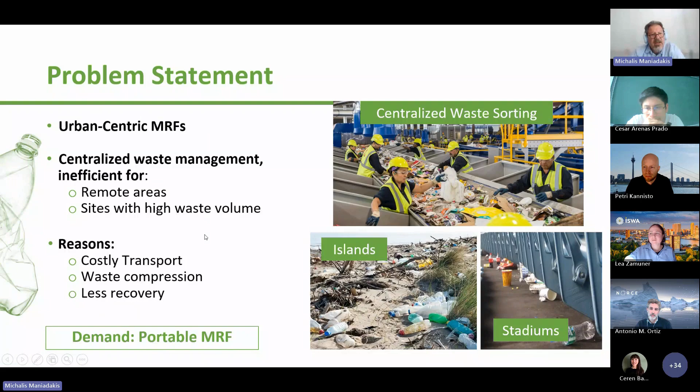So there is a need for a portable material recovery facility, and this is exactly what we are doing in Reclaim. We are developing a low-cost, portable, robotic material recovery facility that is able to sort waste at a local scale but with an industrial level of efficiency. This is more cost-effective, mainly because we save a lot on transportation to the central MRFs.

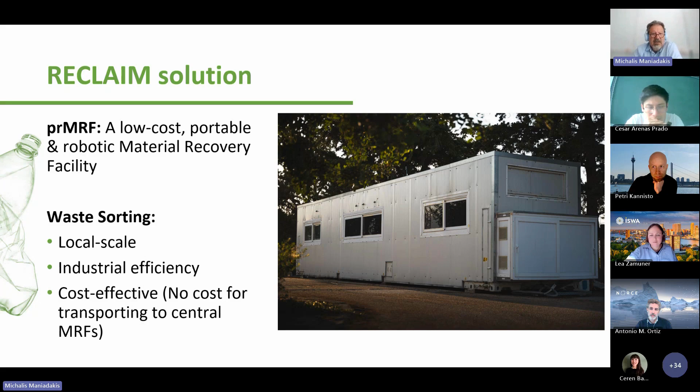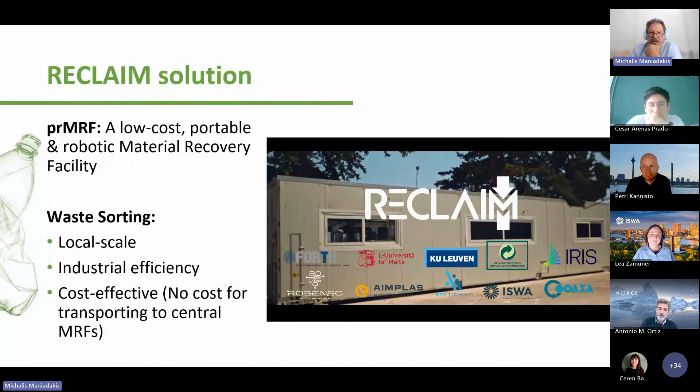This video shows what happens inside this MRF, the container that is full of technology, robots, cameras, and AI. You see there are 5 different robots installed inside the PRMRF that can pick and sort waste into different bins depending on their material type.

To make this real and more efficient, we have developed our own low-cost robots that do the picking and sorting of the waste. These are linear robots with either 1.5 degrees of freedom or 2.5 degrees of freedom. The 0.5 degree of freedom refers to a piston that moves up and down in a binary mode, and you see that things can run quite efficiently.

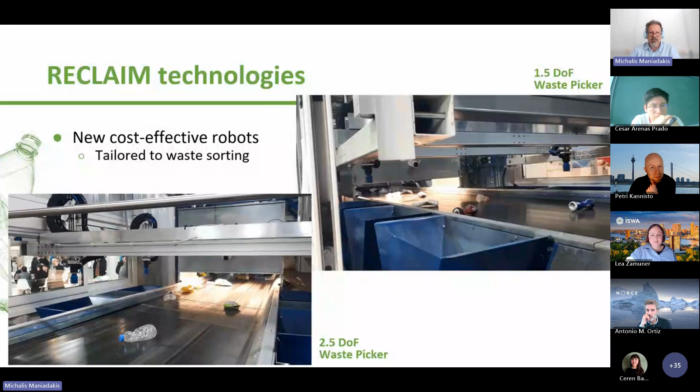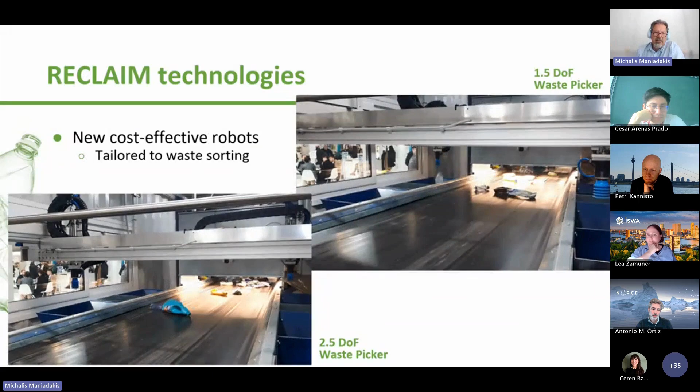Regarding the decision making, we collect a lot of waste images that are processed and used to train our models in order to categorize and identify the waste objects. An example is shown in this figure. We want to categorize objects as PETs, aluminum cans, or HDPE bottles.

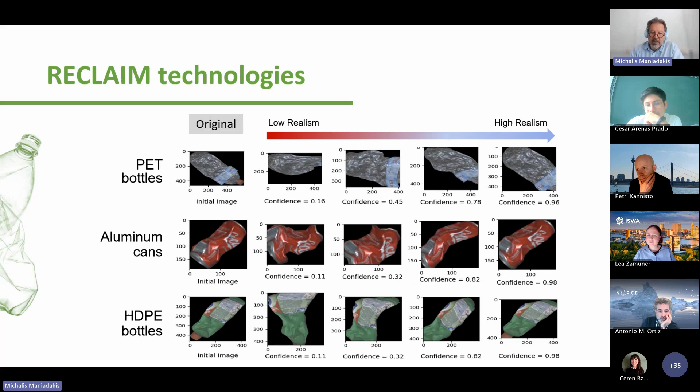You understand that waste images and the deformations they may have are endless. So instead of recording millions of images, we try to produce our own synthetic data, as shown here. We start from an original image on the left and do random transformations to produce new appearances of that object. We have trained a model that can assess the realism of the produced images, and on the right you see quite realistic synthetic images that are used to train our models.

On top of that, there is also the option of dual spectrum categorization, meaning we can categorize the waste in both the visible domain and the infrared domain. This greatly increases the accuracy of our decisions.

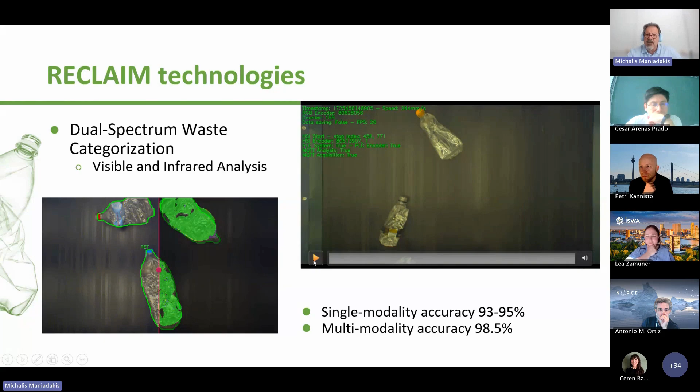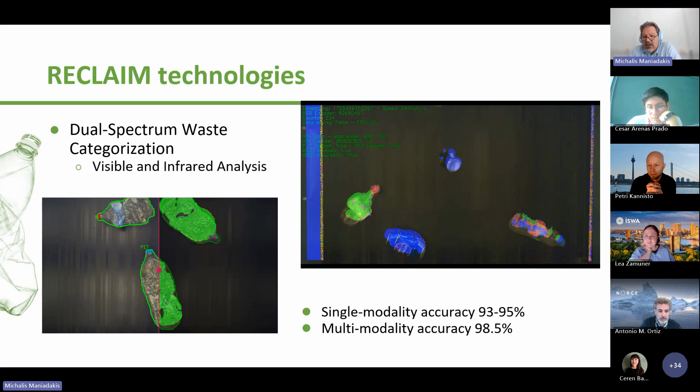In fact, what happens is shown in this video: you see that both categorization approaches have their pros and cons. By combining the two, we can achieve a very highly accurate decision-making procedure that goes up to 98.5% accuracy.

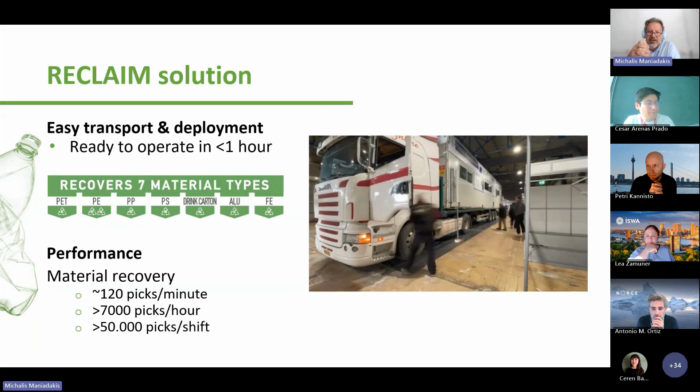Overall, the container we have developed is a full system that can be easily transported and deployed in less than an hour. This video shows our participation in an exhibition where the whole container was transported and ready to operate in less than an hour.

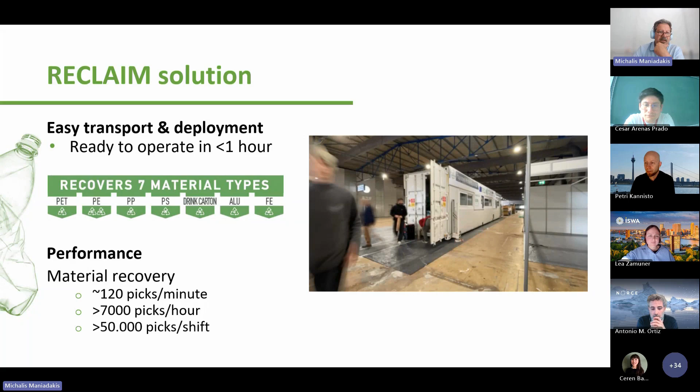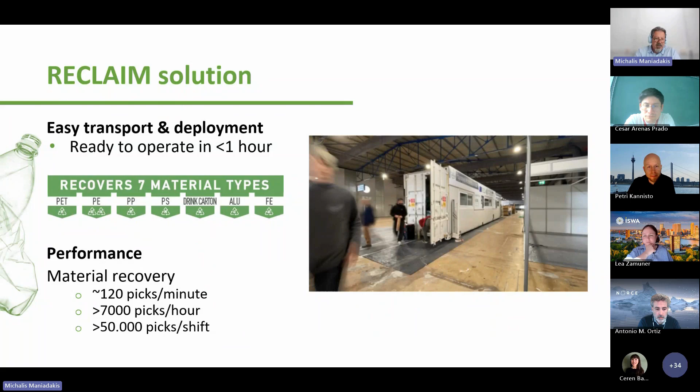The prMRF we're developing can recover up to 7 different material types: PET, PE, PP, polystyrene, cartons, aluminum, and ferrous metals. Regarding performance, it can pick on average 120 items per minute, which overall amounts to more than 50,000 items recovered per shift.

And this is the system that next week we will start using to process waste in Kefalonia Island. These are real waste produced by the citizens and visitors of the island, so we will be in contact with the real demands of waste sorting.

So this clearly shows the need for a small-scale waste processing unit. That is the one that we are implementing in Reclaim. And with that, we believe that we propose a new model of the circular economy that is based on decentralized waste processing, small and local scale.

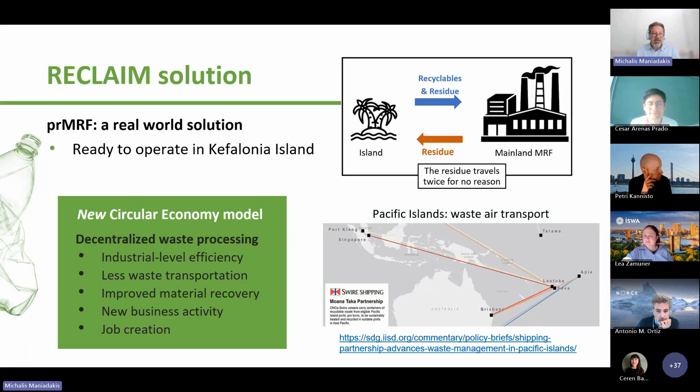And what we achieve is industrial level efficiency for sorting waste, much less transportation of waste. We believe it improves the material recovery because the waste does not need to be compressed, and clearly this creates opportunity for new businesses and new jobs.

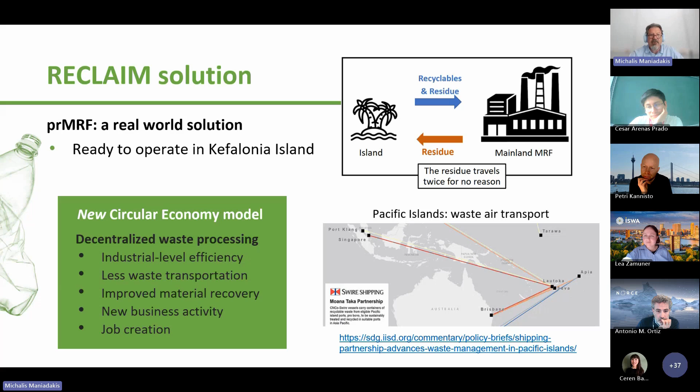So now we can jump over to the other presentation of this morning, moving from municipal solid waste to the metallurgy industry. Petri Kannisto is a researcher of industrial software systems, and he currently works on data-driven software architecture for controlling steelmaking. He's a researcher at the BFI and within the ALCHIMIA project. So if you want to take the floor.

Okay, thank you very much. Can you hear me? Yes. Great. So thank you for the introduction. So it's only 7 minutes, so I cannot cover in depth, but just to briefly give you some motivation and the background of the project. Now it seems that it went black for me now that I use the full screen. So, but maybe just a second. Is it better now? Now it's okay.

Yeah, okay great. So the project goals and problems that are behind, where the motivation comes from: the variety of optimization models we need in this project, and then how to optimize scrap reuse, because in the end this webinar is about waste and reusing waste in a new way.

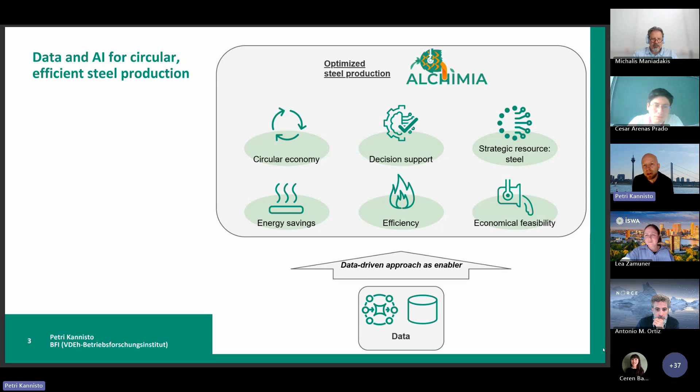Steel is a strategic resource, so we want to make steel in Europe also in the future. Steel is more or less everywhere, you could say. That's why we want it to be economically feasible so that these steel plants can truly remain in Europe. On the other hand, we want to save energy and we want the processes to be efficient. All of these goals can be reached better with data-driven approaches, as you can see at the bottom. So data enables reaching these goals.

So first about the CELSA use case, which is the main use case regarding this presentation. The aim is to make new steel products from scrap. And you could intuitively think we just melt the scrap and then we have steel, but this is not the truth because the scrap comes in many sorts, in many qualities.

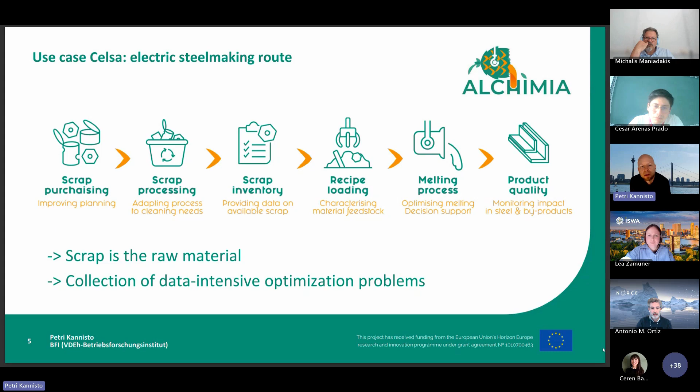Some of the scrap types are purer than others. Then on the other hand, the steel products also vary, so they have various requirements regarding chemical composition, for instance. So there's plenty of steps, and we don't focus on all of these in this project and in this presentation either. But just to give you an overview, there's multiple problems, and all of this can be facilitated with data, transforming scrap into new products.

The other use case, which receives less focus in this presentation, is FDT, Fonderia di Torbole, producing automotive parts from steel. It has still environmental impact reduction as a goal, and also cost reduction, of course, quality standards, and then keeping these processes efficient and not causing too much waste.

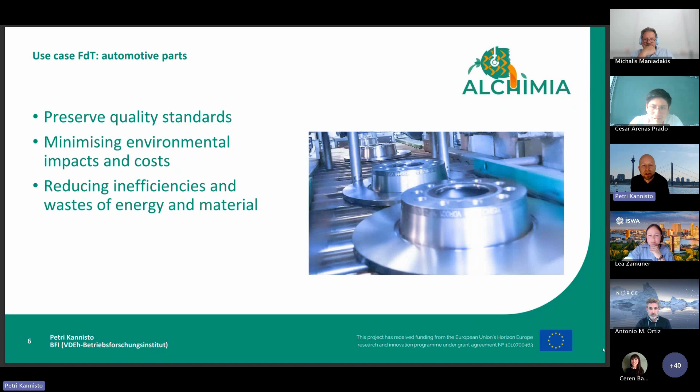As a novelty from this project is federated learning. As a method, this is something that has been applied for some time already, but not so much in steelmaking. So what's behind here, as we have these optimization models, these are operated in plants, in steel plants.

There can be exceptional situations that have not been faced in some of the plants. When the plant faces the situation for the first time, it is beneficial if it has already received some knowledge about this from the other plants.

The other related item to talk about is continual learning. The idea is to monitor the performance of the models and then retrain, regenerate, or reparameterize the model if it seems the performance has degraded. This is something that's going to happen if you use scrap, since scrap as input material is fluctuating and its quality rarely stays very stable.

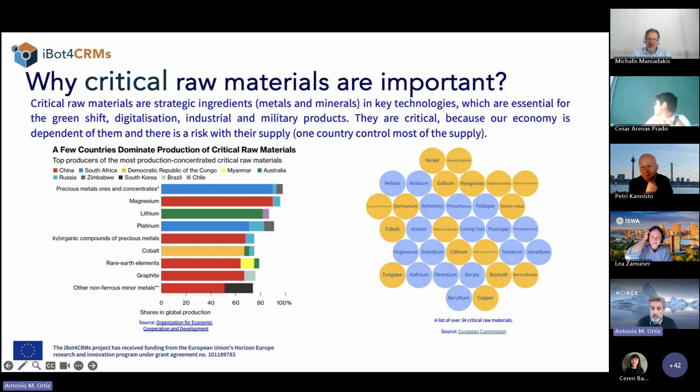So it's key for Europe to recover as much of these critical raw materials as possible from waste, in order to be reused in further manufacturing processes. In fact, the European Commission has set a high priority for this in order to keep sovereignty and resilience in the world industry. So they have published the Critical Raw Materials Act that details all these needs about keeping the raw materials we have and recovering them from urban waste mainly, so we can become more and more independent from the producers of these critical raw materials.

So currently, the situation for urban mining, recovering materials from urban waste, is mostly manual. There is manual sorting from residual waste, manual sorting from shredded products, manual disassembly of products in order to recover these materials. Here, for example, it's shown the recovery of magnets from hard disk drives. There is also manual dismantling of different components, different electronics or other appliances, and the recovery of materials from landfill is not fully explored.

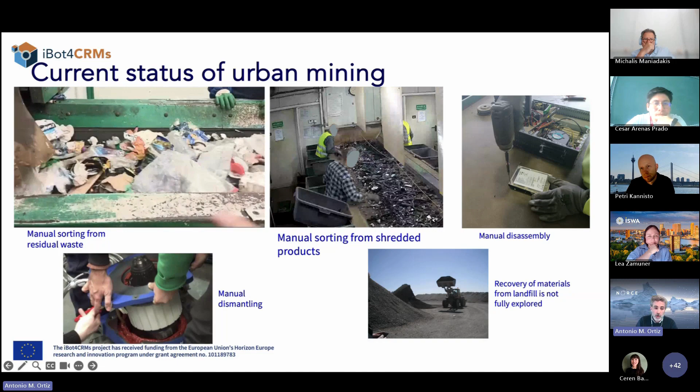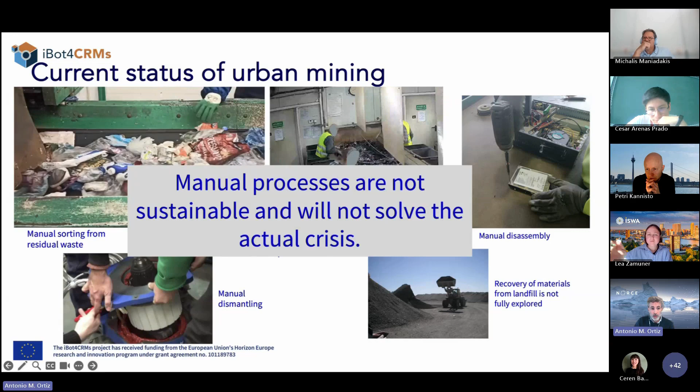The thing is that currently, with the volumes of waste we are generating nowadays, the manual processes are not sustainable anymore, and there's no possibility to solve the current crisis. So in order to solve this, what iBot4CRMs is working on is to enable AI-powered self-learning robots to first valorize or estimate the value of the waste, and then perform this recovery of critical raw materials. The project started by the end of last year, so we are still in the early stages of development.

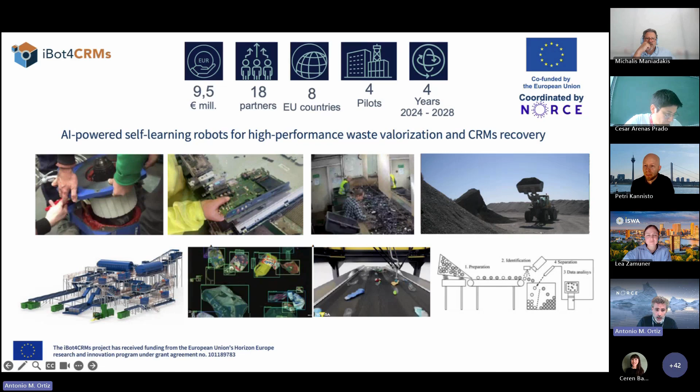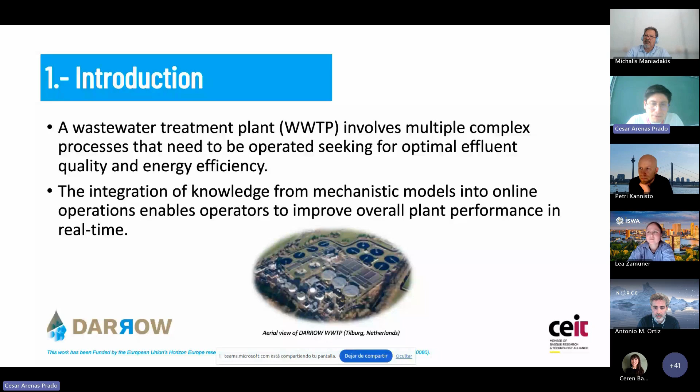Now I present the DARROW project, a European project that wants to increase the technology in wastewater treatment plants, going from waste to resource. Why do they want it? Because they want to reduce energy consumption, since plants consume a lot of energy in the aeration process. We reduce greenhouse gases, since plants produce them, for example nitrous oxide. We reduce waste in the process and chemical consumption, and increase water quality. That's the motivation behind DARROW and how it's going.

We are working together on this. The water comes in through this part - this is the physical process, the settler process - and in that area is the biological process where all the magic happens. We have the aeration process and the biological process, and after that you go to some secondary settlers and it goes out to the river. But here you have some extra facilities.

This is for the sludge. This water, when it comes with the sludge - and this sludge is very rich in organic components - those components are suitable, for example, for agriculture.

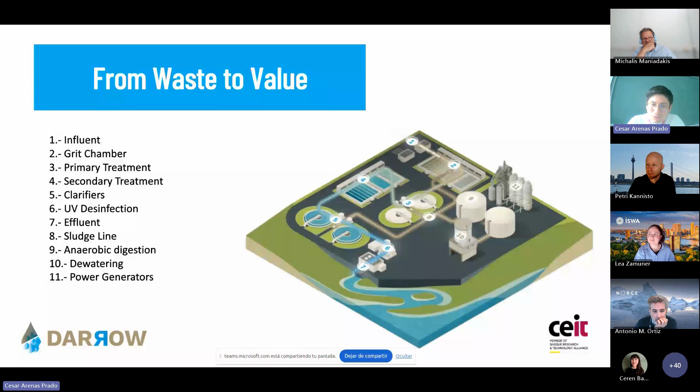Our technical approach or strategy is to use the mechanistic models that come from the past and create a lot of simulations, like 1,000 years of simulations. That's a lot of data.

And we use machine learning models to catch the patterns, to catch the trends, to catch all this internal information that is hidden. And for what? And why? Because we want to create a decision tool. This decision tool is going to be like a support for the workers, for the collaborators inside the plant.

Because as I told you at the beginning, you need a lot of knowledge of physics, chemistry, or biology. But with a machine learning model, we can predict the behavior of the plant, and we can give, after an optimization process, a suitable recommendation. So the adaptation for the workers or the person involved is going to be faster.

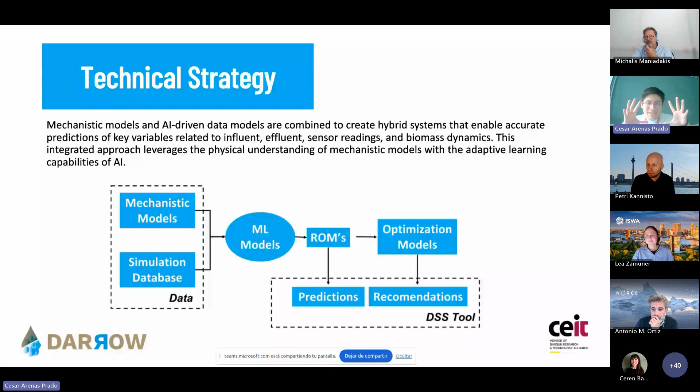So this is the gap that we are trying to fill. This is a space that is between the technical knowledge and the practical knowledge. This is the sketch that we use.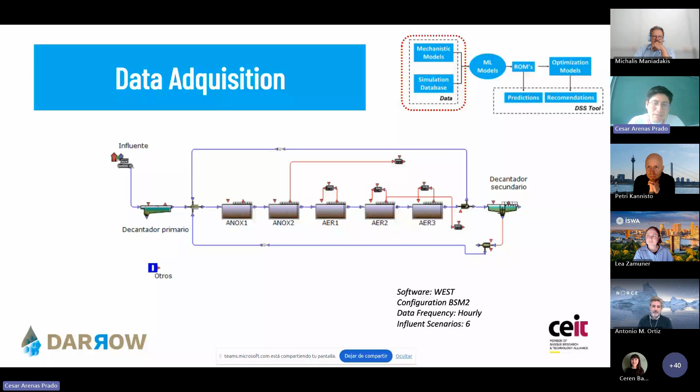So we generate like 1,000 years of data, and we establish our database. So we have information in the past, in the present, and the future.

The influent comes with a lot of pollutants, okay? Nitrogen, ammonium, phosphorus, many things. But you have operational data, like the controls in the aeration system.

Combining it with the biomasses, you will dissolve the pollutants, and you will see it on the effluent. And also consuming energy.

So if we have the data in the past, in the present, we could be able to predict in the future. That's why we use these ML models. For this information, we chose LSTM because they gave us good results, because it's like a temporal series.

Maybe we can go deeper on the technical process if somebody wants to ask me about that, but I'm going to go faster this way. After we have a suitable model that can predict, also I didn't say, but we are able to predict between 12 and 24 hours with good accuracy.

So after that, we realized that if we change the set points and we predict, we're going to get the results. And if these results comply with the European restrictions for the effluents, for example, it's going to be a good solution, but not necessarily optimal.

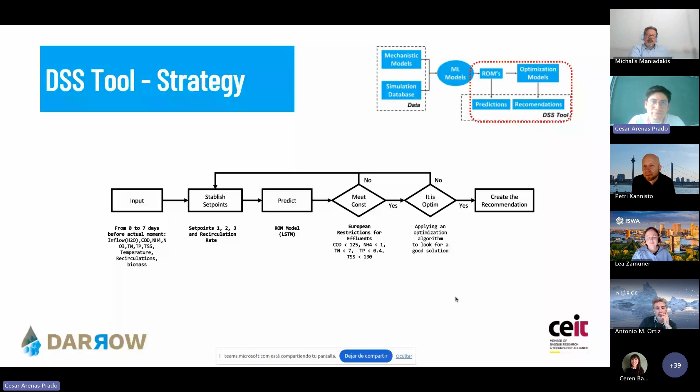For that, we use something. Our tests are being done with genetic algorithms, just to generate multiple solutions. This is the strategy. At the end, it's a multiple objective minimization problem. That's how we do the optimization process.

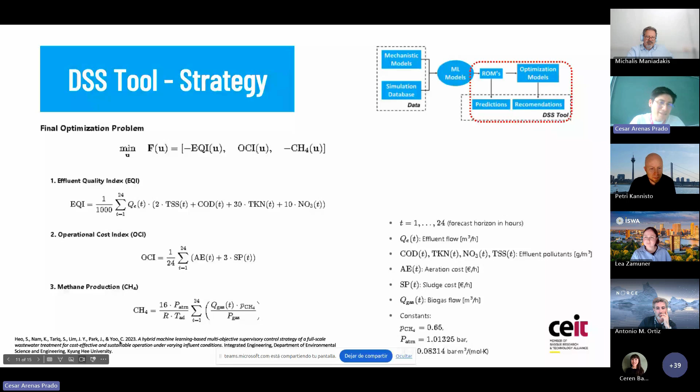I took this as a reference from another investigation from Korea. I just took it from them and tried to adapt it to this investigation. That's something we are going to see at the end of the process.

Now we have the effluent, we have the influent, we have our set points, and for the next, for example, next 8 hours, we are going to establish our set points at these values for being efficient, and that's going to determine our cost and our effluent quality.

So that's what we are trying to do, what we are working on now, just to make the job of the people easier. That's how AI can help people take informed decisions by the end of the day.

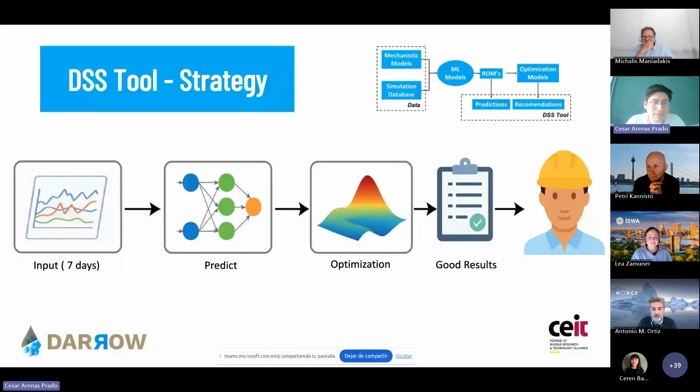Okay, well, I think that's all on my part. If you have any doubt, please just let me know.

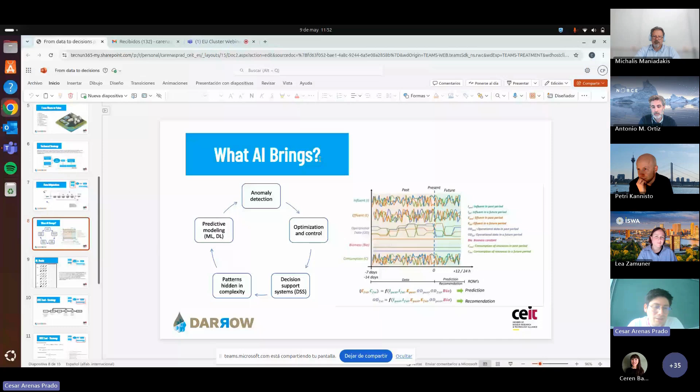This is a very important point and the strength of this method, because we combine theoretical experience and practical experience, and then we can make decisions based on the optimization process. Going to the second part of the question, the optimization process is an iterable process that changes the set points, the operational points in the plant, and predicts with these set points. With the influent set points and predictions, we will be able to see if the prediction can meet the constraints and if it is optimal.

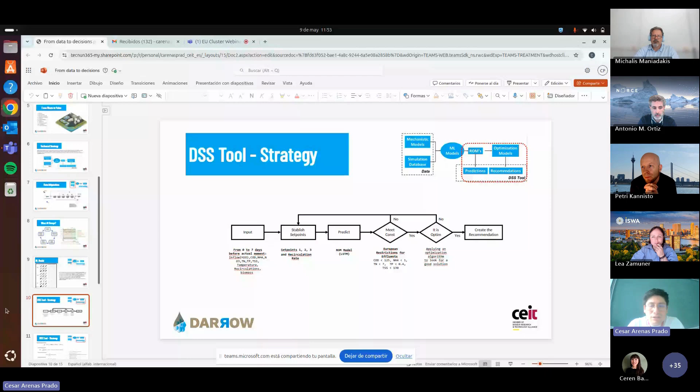So what are the rules for the optimization? We have the effluent quality index, which is a combination of the main pollutants that we have to avoid in the effluent. This effluent has a weight.

We establish an equation, establishing boundaries from European Union limitations. We have the operational cost index, the cost of operating the plant, and the methane production going through the sludge line. Combining these factors creates a multi-optimization problem with many possible solutions. With a genetic algorithm, we choose a good one—maybe not the best, but good in a reasonable time. That's how our optimization process works.

Yeah. Yeah, thank you, that's perfect.

So I have one last question for the panel discussion, addressed to all four of our experts. The projects are all developing solutions that we hope will be adopted by the industry. What are the challenges you foresee arising from that? And do the solutions you mentioned scale up also? Maybe we can keep the same order—I'll start with Michalis.